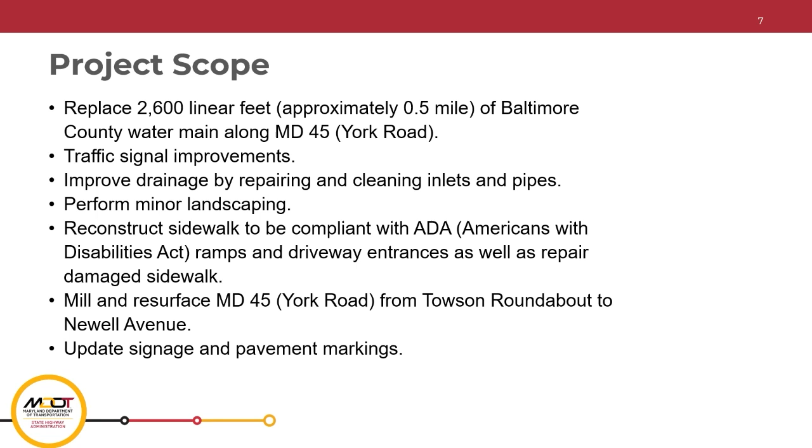The project scope consists of replacing 2,600 linear feet, approximately half a mile, of Baltimore County water main along Maryland 45 York Road. Traffic signal improvements, improving drainage by repairing and cleaning inlets and pipes, performing minor landscaping, reconstructing sidewalk to be compliant with ADA (Americans with Disabilities Act) ramps and driveway entrances, as well as repairing damaged sidewalk. Mill and resurface Maryland 45 York Road from the Towson roundabout to Newell Avenue, and update signage and pavement markings.

At this time, I would like to turn the presentation over to Mr. Pawan Podell from the Baltimore County Department of Public Works to discuss the work associated with construction of the water main improvements.

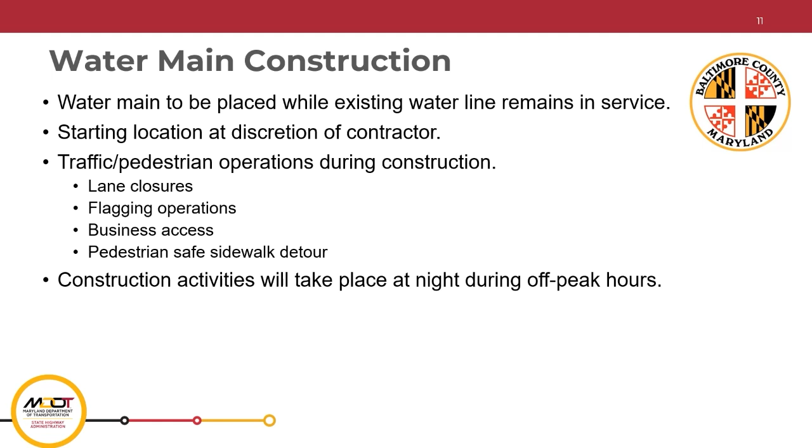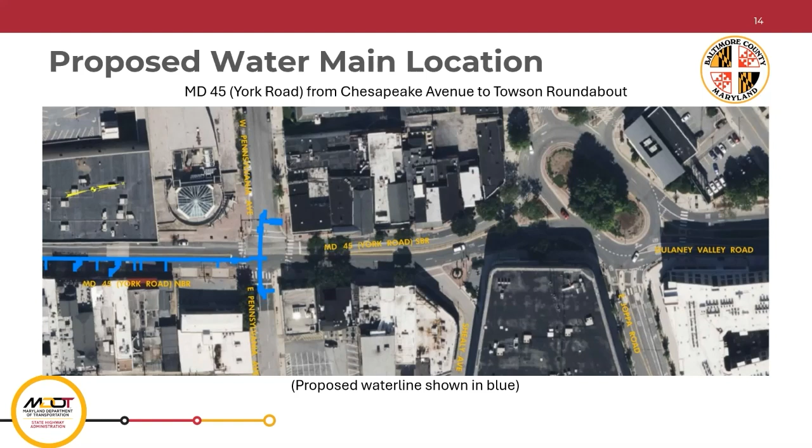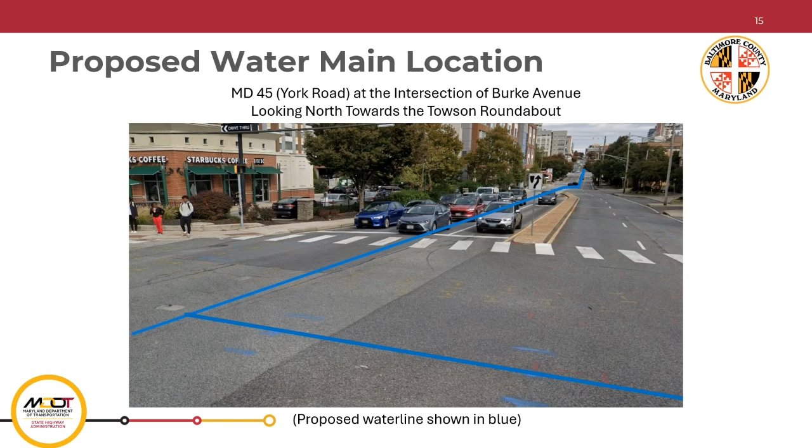I will now turn it over to Mr. Jordan Vogt, SHA Project Manager, to speak about roadway construction.

Jordan, you appear to be muted. Apologies for that, everybody. Thank you, Pawan.

I would now like to highlight the proposed traffic signal modifications being proposed under this project, beginning with the traffic signal at Burke Avenue. The proposed modifications include upgrading the existing audible, pedestrian, and countdown signals, more commonly recognized as the push buttons used to cross the street. Additional improvements include upgrading the existing crosswalks, as well as installing a new traffic signal cabinet. There are no proposed signal operation changes at this intersection.

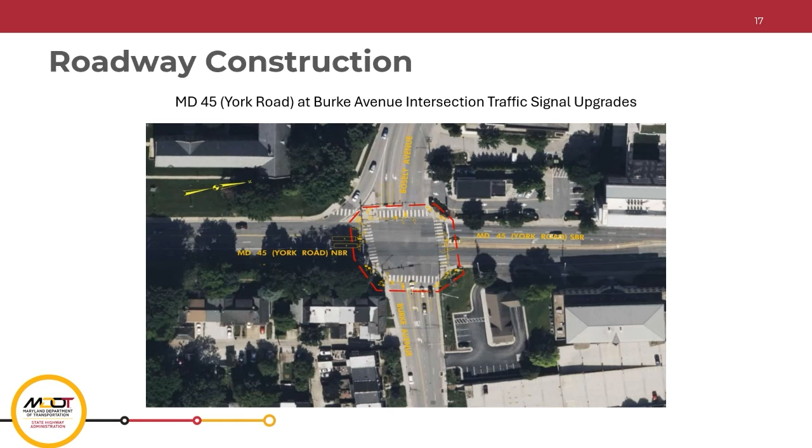The next intersection is Towsontown Boulevard. The proposed traffic signal modifications include upgrading the existing audible, pedestrian, and countdown signals and upgrading the existing crosswalks. There are no proposed traffic signal operation changes at this intersection.

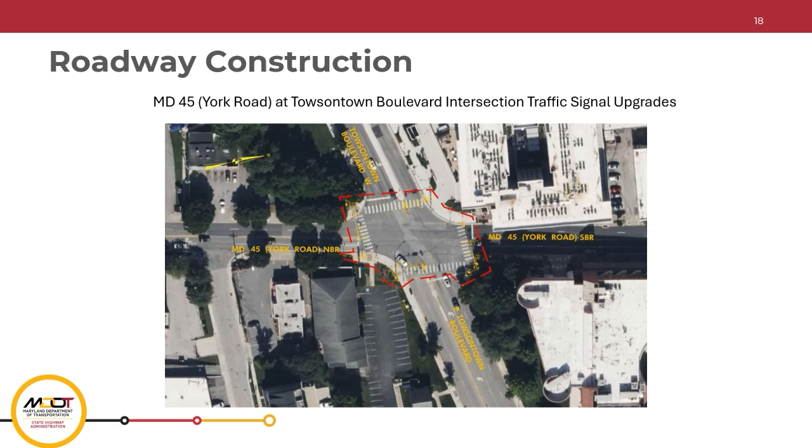The next intersection is Chesapeake Avenue. The proposed traffic signal modifications include reconstructing the traffic signal, which will also include upgrading the existing audible pedestrian countdown signals and upgrading the crosswalks. There are no proposed signal operation changes at this intersection.

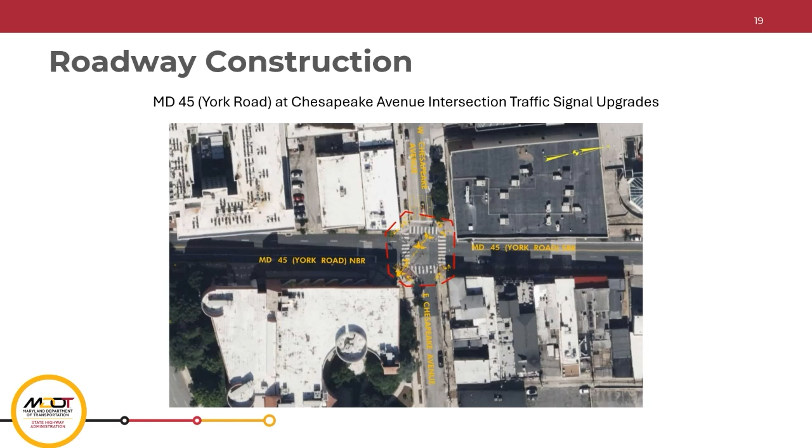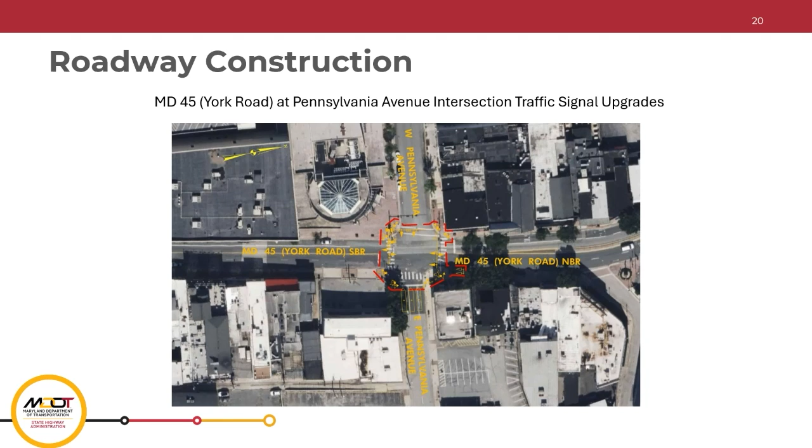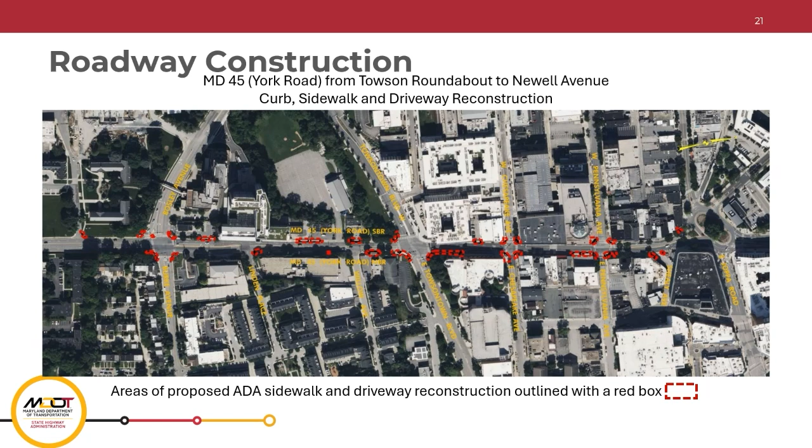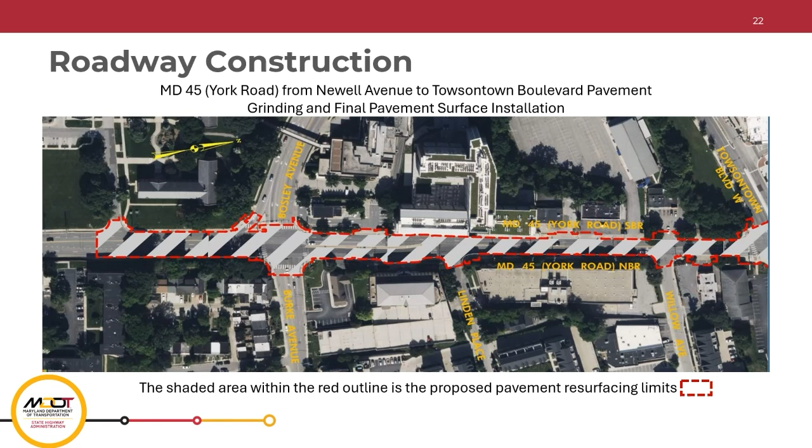I would now like to introduce Mr. Payam Azban from District 4 Traffic, who will be going over the project's working hours and impacts to motorists and pedestrians.

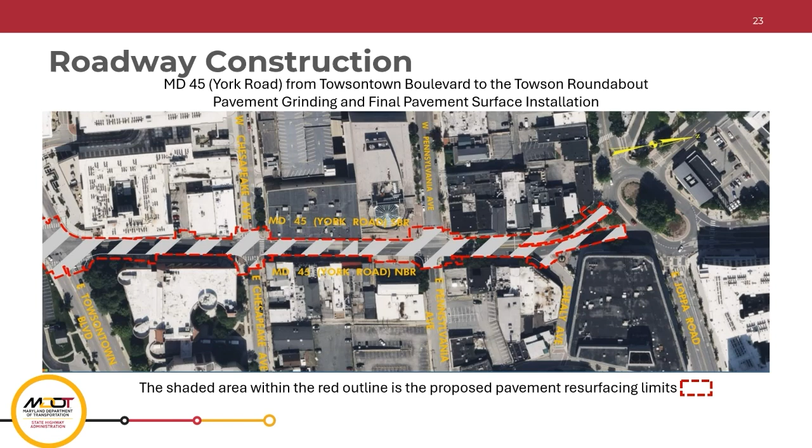Good evening, everyone. My name is Payam Azban, District 4 Traffic. As you heard, this project is scheduled for nighttime work, and lane closures are typically scheduled from 9 p.m. to 5 a.m. the next day.

Daytime lane closures may occasionally occur for special operations for limited off-peak hours. Business access and pedestrian pathway will be maintained during construction. On-site parking may be temporarily disrupted, and transit access and stops may be adjusted during construction.

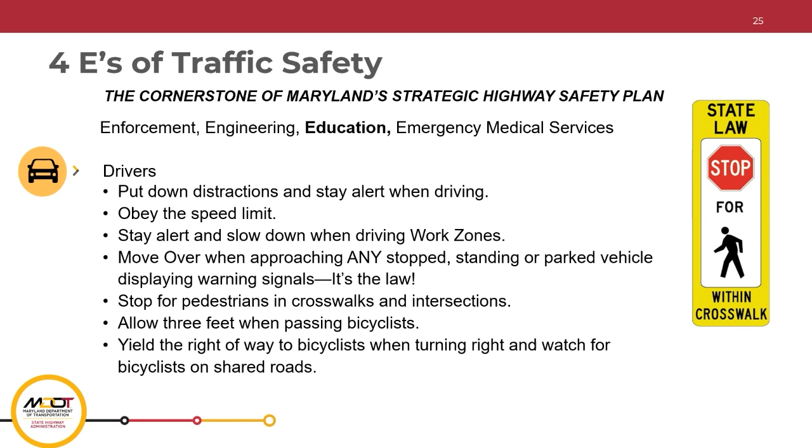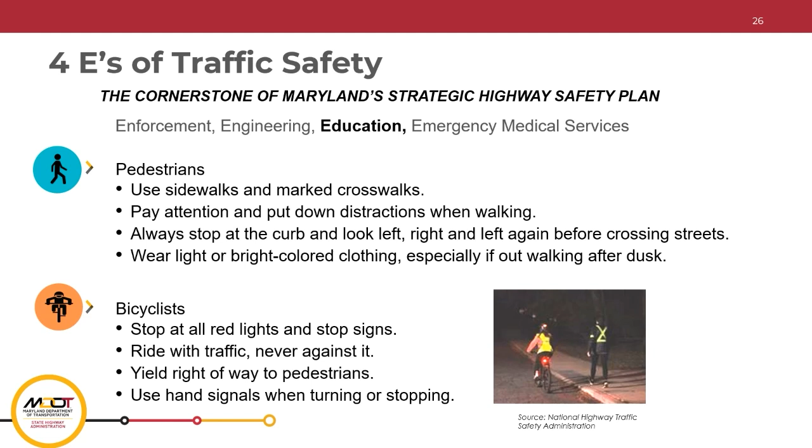Thanks, Holly. As Holly just mentioned, my name is Judith DeVasti, and I serve as the Title VI Manager for State Highway Administration. Title VI of the Civil Rights Act of 1964 provides that no person shall, on the grounds of race, color, national origin, sex, English proficiency, or disability, be excluded from participation in, be denied the benefits of, or be subjected to discrimination under any program or activity.

Title VI gives the public the assurance that agency services and resources will be allocated fairly, and any negative transportation impacts shared equally. If you feel that State Highway Administration is not meeting the expectations of Title VI and would like to either file a complaint or seek assistance, please feel free to contact me by phone at 410-545-0404 or by email at sha-title6@mdot.maryland.gov. I'll now pass the presentation back to Joe Harrison.

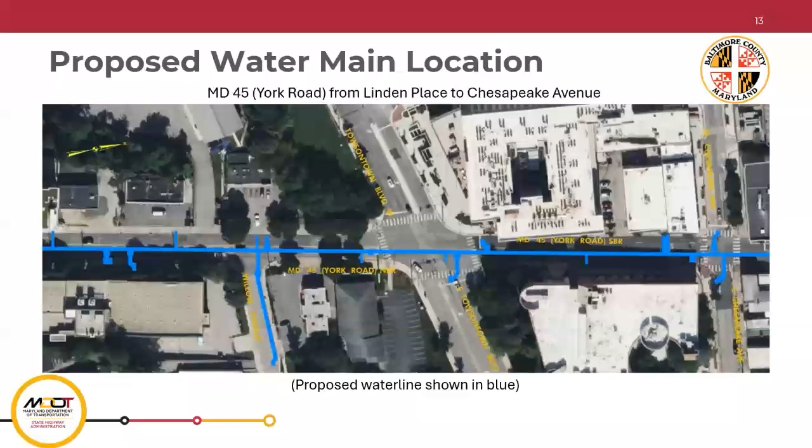Okay, now why is the construction taking place during nighttime hours? This is mostly due to the volume of traffic during the day. If lane closures happen during the day at that section of the road, it doesn't work well because traffic will back up for so long and the capacity will be reduced. This is the main reason from a maintenance of traffic perspective.

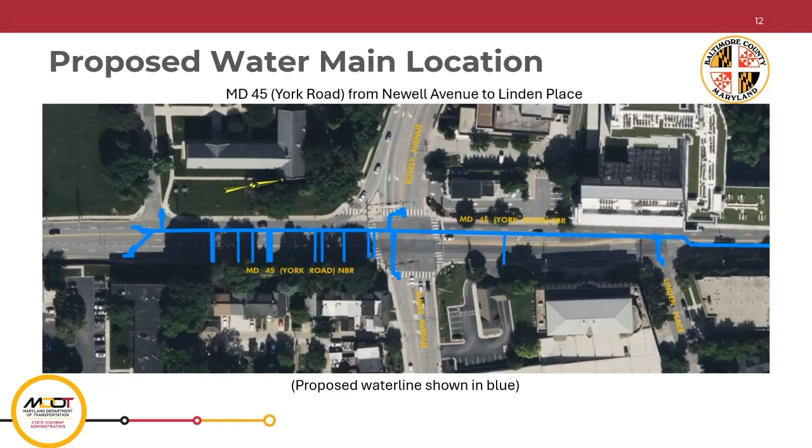Can we address for a minute the sequencing of how the construction is envisioned to take place? In other words, is this going to be taking place in sections of the corridor? Do we know any information about that, in what direction perhaps, and how long each section may take? Let's do whatever we can to help folks visualize what may be taking place soon. Who can talk about that? I think Pawan, would you mind taking the lead on this one, because the road, the water line is the first limits or the first element of work.

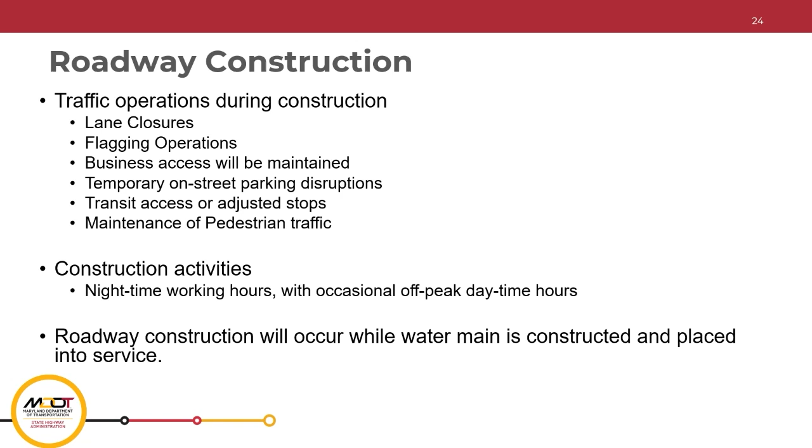As shown previously, there are 3 phases. The first phase is waterline construction, and even the waterline construction we divided into small phases, like 3 phases. The reason for that is we allow the contractor to choose where they want to start from, but they do work in a small section. They install a new pipe, they test it, and once everything tests and passes, that's when they're allowed to tie into the old one and transfer all the services with minimal disruption of water services. So the phasing will be done in small areas.

Sorry, what was the question again? I think I missed it, I only answered one part. Yeah, I think you did a good job with that. Does anyone else have anything to add in terms of the construction sequencing and scheduling?

Okay, we have 2 more questions, and then we'll go to closing comments. The one question relates to what we just talked about, regarding the water construction and water main replacement project. The question reads: how much advance notice will you give businesses before you shut water off?

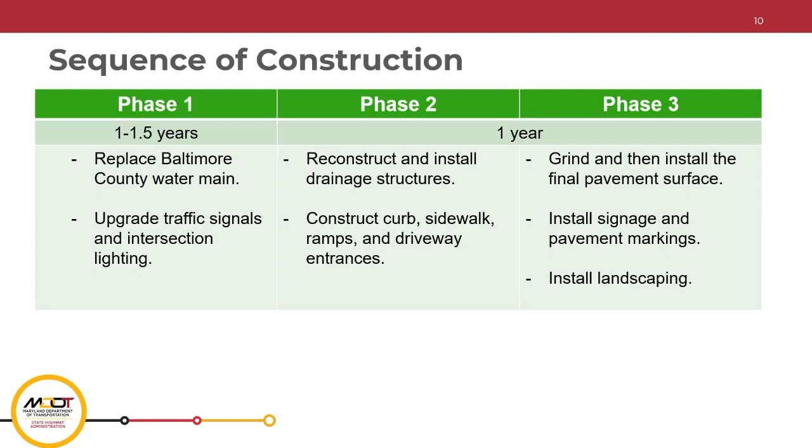Okay, final question. Let's talk again a little bit about how folks can stay informed and reach out if they have questions or concerns as the project moves forward over the next couple of years. Who would like to talk about that?

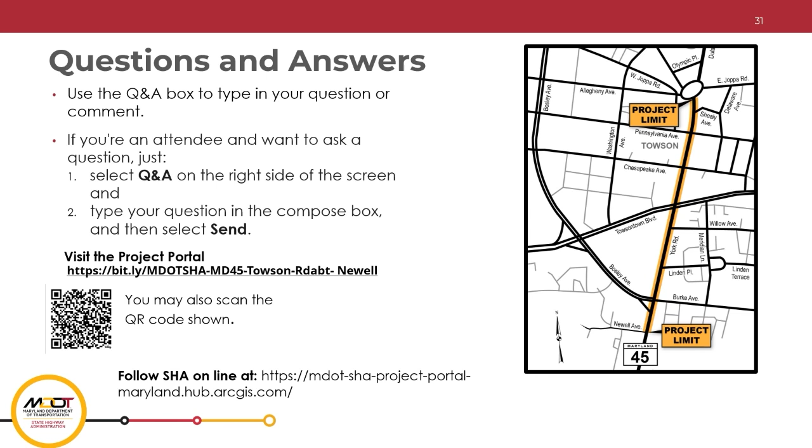Thank you, Holly. Yeah, sure thing. Fran, feel free to chime in too. This is Holly Pearl again, Community Relations Manager. Our project portal page will be kept up to date so you can always find out what's going on with the project. There's a QR code on the screen you can scan and it'll take you right to the page. The last slide has contact information for the project team, if you have questions or need help getting to the project page, these are the folks you can reach out to. Be sure to follow us on social media—there'll be updates there from time to time as well.

Great, thank you, Holly. Fran, did you want to add anything? Okay, I think we're good there.

All right, it's time to conclude questions and answers and move to closing comments. I'd like to thank everyone who submitted questions tonight—they were very good. For those who were not able to attend, please let folks know they can go to the project portal page. This meeting was recorded, so it will be available in a couple of days for those who would like to see it again or see it for the first time.